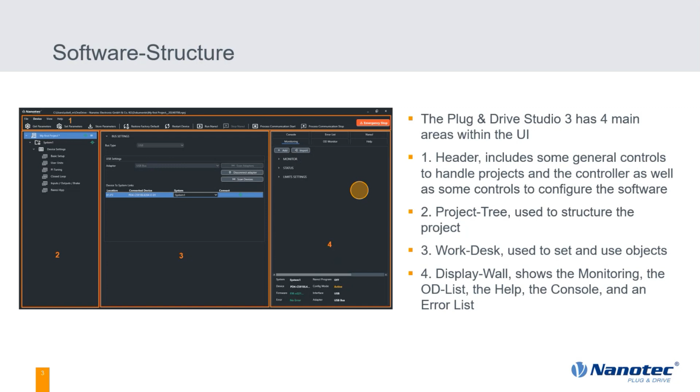Then we go on here on the left in part 2 with the project structure. So if we open the template, we will see this project tree, which is used to structure your project and the included devices. It mainly has 4 layers. The first one is the project layer here on the top. In this case, it's called My First Project. This is the overall container for everything that belongs to your project, the main project layer.

The main project layer then contains the different systems, we call it in this case. But in the end, a system is just a single device. So if we talk about my PD4C head here at my desk, then system 1 is just the Plug & Drive motor PD4C. Then we can have a look at the next layer, which is 3.

In this case, it's called device settings. It's simply a module group layer. It's used to sort different modules into a group. The different modules, you can see them in area 4 here. These different modules can be grouped into this module group layer so that it becomes nicely usable and you have a nice overview over the settings. You can also minimize module groups that you don't need that often, for example.

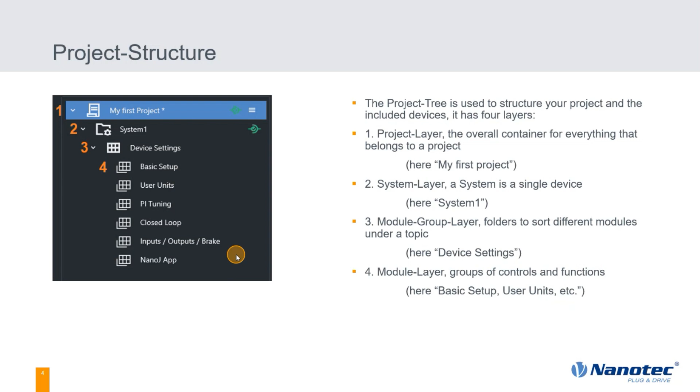So as I said in the beginning, this structure that you can see here is not fixed. You can adjust the template according to your needs, according to your wishes. If you, for example, want to add a second system to your project, let's say you have a CAN bus system and connect a second motor to your CAN bus, then you can simply right-click on My First Project and add a new system, and it will show up here.

Then we can add a new module to that system, a new module group in this case, by just right-clicking on new system and add the module group. And then, of course, you can also add different modules to that group. You can either do that with a right click, or there's also a button on the right, which we cannot see here, but you can also click that. And with properties, you can then rename the new module according to your needs so that you know what you want to structure there. Each of these items can then also be exported and imported, including all the underlying layers.

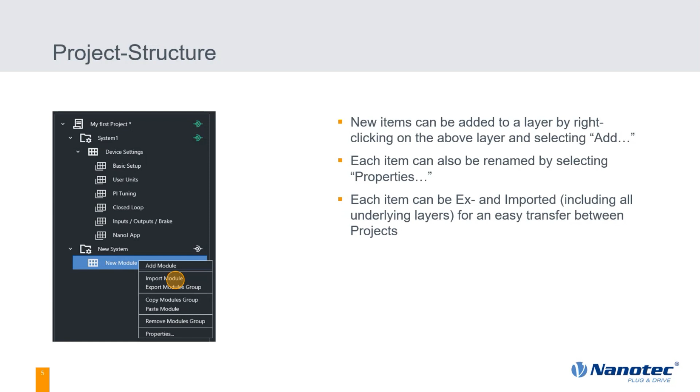So if you export a system, then you of course have all the underlying layers like the modules included. So you can export this module group as a file, save it on your computer, and if you have a different template, for example, or start a new template, you can import that layer in your template. So you can easily transfer all the modules and layers between your projects.

So let's have a look at the module structure. As I said, here in the middle, the work desk, that's the main part where we are going to work in the software. So if we click on basic setup, for example, here on the left, we will see all the controls in the work desk. That's basically the contents of your module.

These different controls like motor type, pole pair count, and so on, these different controls can be grouped into so-called control groups, for example, called basic, current settings, and same as in the project tree, you can also minimize these parts so that you have a nice overview of what you want to use and what not.

To add a new controls group, just right-click on the module where you want to add it. And if you want to add a control, right-click on the controls group where you want to add it. Quite easy. These different controls are so-called parameters.

A parameter is basically used to read or write a value, or you can also do that bitwise or bytewise of an index. You can select from different display options when adding a parameter. For example, you have normal controls where you enter a value, like pole pair count, where you just enter a value and write it to the controller. But you can also define drop downs where you select from different options that you want to write to the object that is selected here.

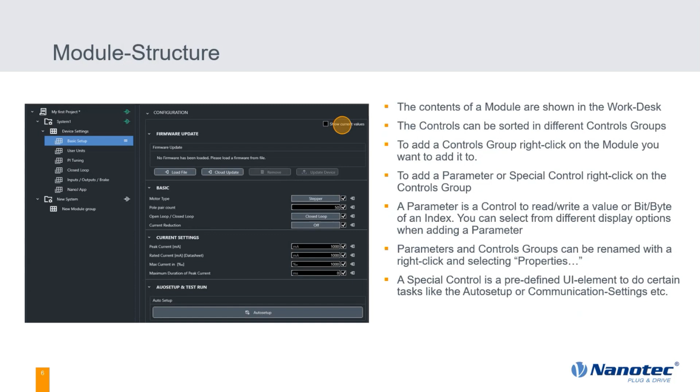Next to the name, it will also show the actual value, which is apparently on the device. If we go back one slide, one important thing is here, this option, show current values. If you want to see the current values of the device, just check this checkbox. Then you will see the actual values in this place.

Then we have an input box where you can write a certain value that you want to write to the index. And next to this input box, we have a checkbox, which is kind of important, because only if this checkbox is marked, then you can upload the marked objects with the set parameters button.

What you can always do, also without marking it, is use this button. With this button, you can directly write the value that you have put into the input box to the controller. But the get parameters and set parameters buttons, and also the store parameters button, will only write the values that are marked.

So the set parameters button will transfer all the marked values to the controller, the get parameters button will read all of the parameters that are marked from the controller and write it also here in these input boxes. The store parameter is basically for permanently saving objects, so it transfers the values to the controller and then permanently saves all of the marked parameters.

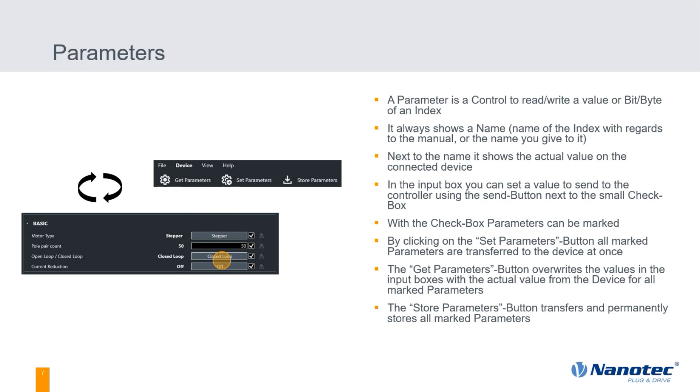I already mentioned them. We also have special controls in addition to the normal parameters. Special controls are available to handle specific functionalities of the controller. Let's go through the different examples of special controls that we have right now.

Auto setup is basically for calibrating your motor. It will measure the encoder alignment and some important motor parameters, which is important mainly for external controllers. If you have an external controller and external motor with encoder it matters, but if you have a plug-and-drive motor, it's not that important because it's already done at factory.

Then we have a special control for firmware updates. It's not shown here on the left, but it's, as it says, for up and downgrading the firmware on your connected device.

The next one can also be seen here on the left, simple jog mode control, which allows you to move the motor at two different speeds, a fast one and a slow one. Important to say, as long as you hit this button the motor will run. If you don't hit the button anymore, the motor will stop. So a very easy control for testing your motor.

If you want to have a bit more sophisticated test runs, then you can use the motion test control. This one is used to perform either single or sequenced moves in profile position, profile velocity, or in torque mode.

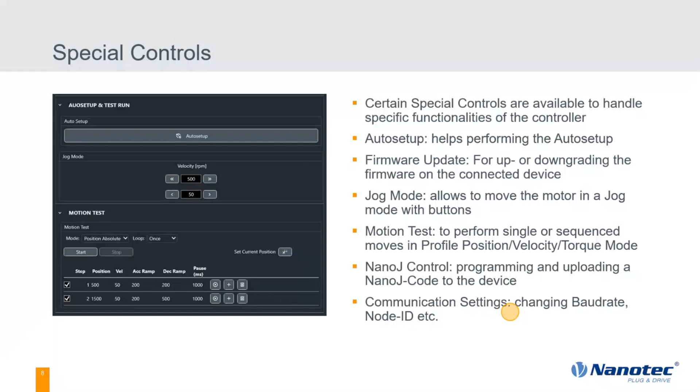All right. The next one is the display wall. So if you remember, that's area 4 in our Plug & Drive Studio 3 software on the very right. First one is the monitoring tab. Here you can generate groups and show different parameters of interest to get permanent feedback about the actual value of these parameters. In this template, we have grouped a few different examples.

So for example, error code, operating conditions, actual values of the position, of the velocity, also the actual values of the digital inputs, of the outputs, and so on, of the analog input. So here you can group certain objects of interest yourself, which you always want to track. For example, you could also add the status word of the controller. So here you're quite free, of course, what you want to add and what is interesting in your application.

Then we have the OD monitor. I think I already mentioned that. It shows a list of all available objects on the controller. The Help tab shows information about the selected object in the work desk directly from the technical manual. So this is also something new compared to Plug & Drive Studio 1 or 2. We did not have such a help functionality there.

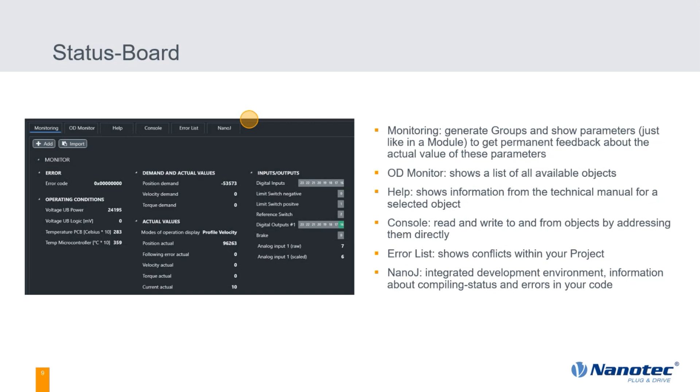And then lastly, NanoJ, which is the integrated development environment, as I said. It shows information about the compiling status of the code and errors in your code. And as I said, you can, of course, upload the program from there. All right. Then our last slide on the PowerPoint is to show you how you would establish communication with a device. As an example, here you can see the PD4C, as I mentioned.

So if you want to establish communication, we have to click on the project in the project tree, this one. So in this case, my first project. Then we select the bus type in this dropdown. In our case now USB. Then we select the adapter that is used for USB, and usually there will only be one for USB. With scan adapters, we would see different adapters, but now we only have this one. So we connect to the adapter and scan for devices.

If we scan for the devices, we will get a list of all the available devices here in this list. And you can see now here the PD4C, and in the system column, we determine which system we want to connect this device to. So in our case, we only have system 1, so we choose system 1. With this connect button, we finally establish the communication to our Plug & Drive motor. And if it appears green, then you can be sure that the communication is established correctly.

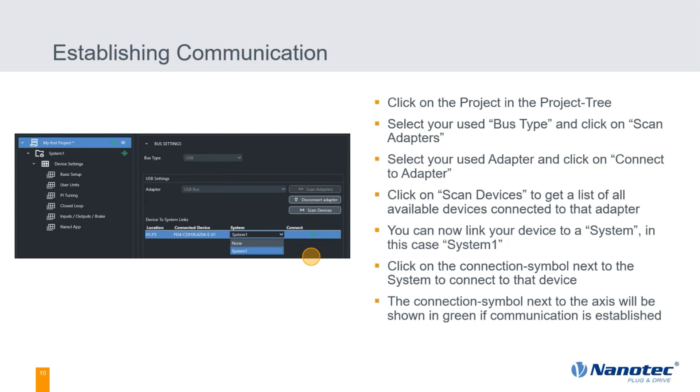So now we are connected to the controller, and I think it makes sense that we now have a look into the software itself. Okay, so we have seen it in the beginning of our training. If we open Plug & Drive Studio 3 for the first time, we will see this template selection screen. So in our case, we have now connected a Plug & Drive motor to our PC. So we choose the template PD motor.

We can adjust the project name as we like, but in this case, I will just leave it as it is. Then we hit create project. Okay, it was opened on my second screen, but now you should be able to see it. So this is now how the software looks like.

The first step would now be to establish the communication to our Plug & Drive motor. In the bus type, you have a few different options. Basically, all field bus interfaces that we offer so far, apart from Modbus TCP and EtherNet/IP. In this case, you would just use Ethernet with REST. But in our case, we have a simple USB motor, so we choose USB.

We scan the adapters, but actually we will see it's only one. So we connect to this adapter. We scan for devices, and now we see we have one device connected to the USB bus, and this is my PD4C on the desk. So we choose now system 1, which is the only system that we have. And with this button, which is currently white, if we click on it, it becomes green, and we are now connected to our motor.

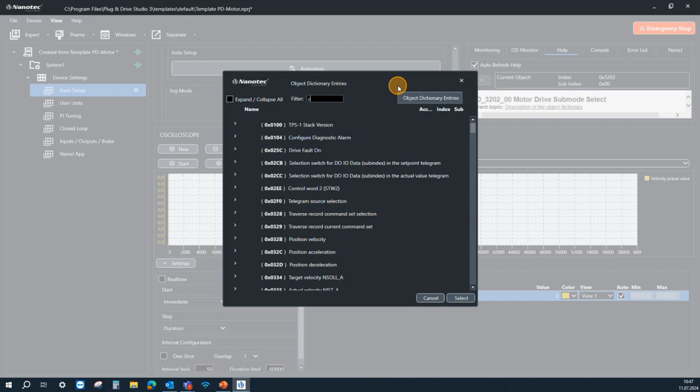For example, if we want to have a look at the current, now we get all objects that have current as a description. We are now actually interested in the motor current. So we use this one, actual current. That's the current that is currently applied to the motor. Select. And now it definitely makes sense to use a different color for this object, for example, red.

Then you have a few more settings for the oscilloscope. For example, a start trigger. You can, for example, do an immediate start. You can also say, okay, I want the oscilloscope to start once the motion test is started. We can also test that in a second, but now we do immediate.

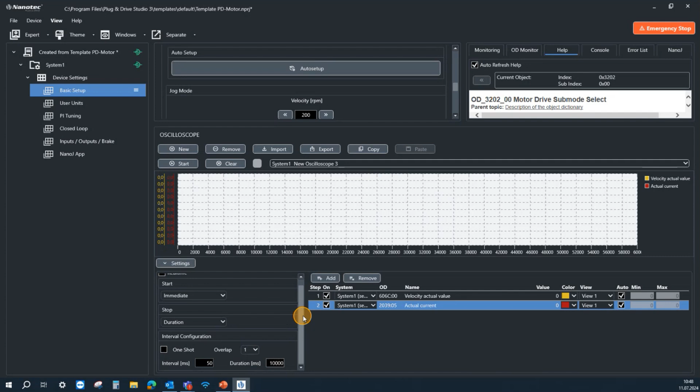You can define a stop trigger. Either you say, I just want to manually stop the oscilloscope, or we define a duration. So let's say a duration of, I don't know, 10 seconds would be 10,000 milliseconds, and the sampling period, let's leave it at 50 milliseconds. So now we have done all the settings. We can minimize this window.

We want to have access to the jog mode, of course, but now we have an immediate start. So now we see the actual current, which is quite low, of course, because the motor is not powered yet. And in yellow, we have the actual velocity. If we now run the motor, we can, of course, see the actual velocity rising to 200 RPM and the actual current rising to about 200 milliamps because I don't have any load connected here on my desk.

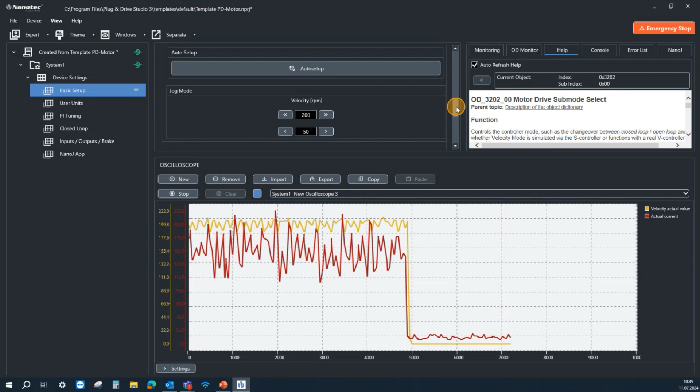So this is how you would use the oscilloscope. Regarding the start trigger, which I think is quite nice. So we need to stop it again, have a look at the settings. So we can define the motion test as our start trigger.

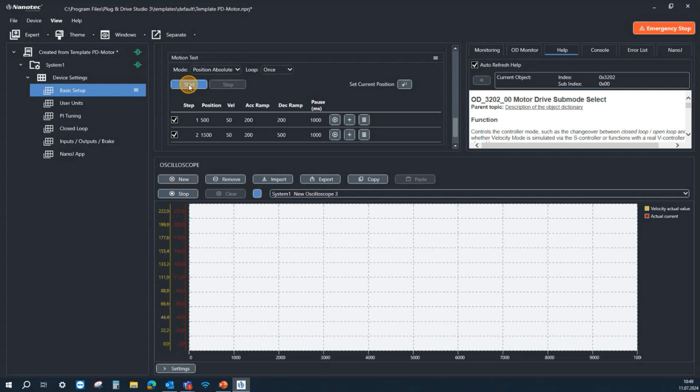And if we now start our motion test, so if we now click start on the oscilloscope, nothing is recorded because the motion test is our start trigger. So if we click start, also the oscilloscope starts with the motion test. So this is a quite nice feature, I think.

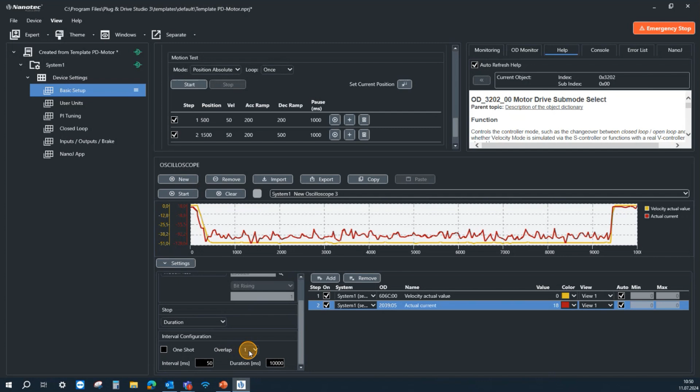If we stop it again, I can also show you something that I actually like quite a lot, because if we go back to here in the interval configuration, you can define a so-called overlap. Right now, we did not have any overlap. If we, for example, set it to 3, maybe let's use a bit less of duration, 5 seconds maybe.

What happens now if we start the oscilloscope, which is then started with the motion test? It will now record for 5 seconds, and the overlap now means that the next oscilloscope values are overwritten. Actually, maybe let's use a bit less of duration and shorter interval. Motion test is the start trigger.

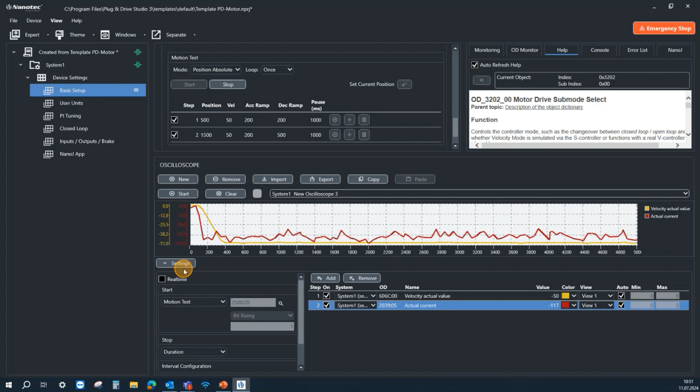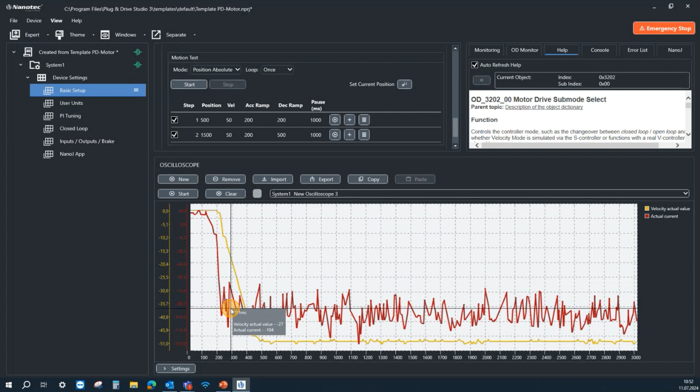Okay, the motion test now just takes a bit too long, but what you would see actually with this overlap functionality is that the next oscilloscope values are then overwritten to these, and the old values are displayed grayed out. So that's what the overlap means. But for now, I think we will go on. So that was the oscilloscope. We can now choose it to not be shown again.

So that was our basic setup module group. Then we have another module group for the user units. So here you can choose the SI unit for the velocity and for the position. So for the velocity, the default user unit in the latest firmware version is revolutions per minute. If you want to change that, for example, to meter per second, then you can do this with these drop downs. Just write this to here, then we have meter per second, and then maybe it makes sense to use, for example, meter, or if we use 10 to the power of -3, then we have millimeter. So this is how you can set up your SI units in this tab.

Of course, if you have a linear system, for example, then you need to define a feed constant. For example, the thread lead of your lead screw. If you have a gear ratio, then you can define the gear ratio here. The advantage is that your user units are then always after the gear, not after the motor. And in this case, the feed is calculated from the feed constant. Okay, but let's go back to revolutions per minute, and for example, you can also choose increments without any exponent.

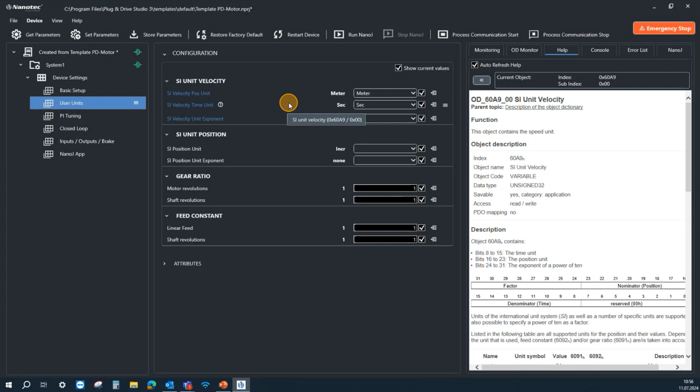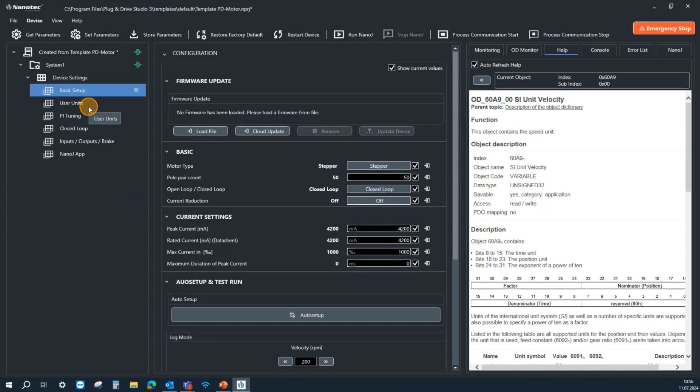Okay, maybe that was a bit of a bad example in this module, because there are still some bugs maybe in our templates or in the software. So maybe we go back to the basic setup where it actually should work. So if we, for example, use a different peak current here and then go to get parameters. So here, this is how it should work with the get parameters. I have noted down this problem, so yeah, there will be updates coming and new templates, so don't worry about this one. This is how it should work, but I think the basic functionality of the get and set is clear with that.

In the PI tuning tab, we have some controls and parameters for the motor tuning. We have the position loop, the velocity loop, and the current loop. The current loop is separated into the IQ and ID, which is the torque building current and the flux building current. So here you can adjust the tuning parameters, but basically, especially for plug and drive motors, the presets that you have here should be fine. But if you see, okay, with my load, the motor is not behaving as I like, then you can adjust the tuning parameters with these values here.

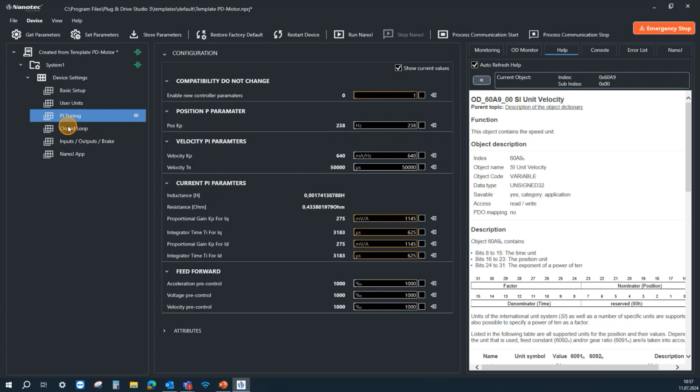Then we have a few settings, let's say advanced settings for closed loop. You have some additional functionalities in closed loop like auto alignment, real torque mode, slow speed mode, or activating the position loop for velocity modes.

Then, as we have seen before, the auto setup will run at some predefined standard settings, but we have included here two additional settings that are sometimes helpful. Let's imagine we have a linear actuator where you don't have as much space for the motor to move. Then it might make sense to use the short auto setup run, because then the motor will not move to some block, for example, which would be bad for the auto setup results. You can also limit the speed of the auto setup in per mil with this setting.

Here on the bottom, you can see the measurement results from the auto setup. So important for sensorless mode is resistance, inductance, and magnetic flux. So if you, for example, see there's no flux measured by the auto setup, you might want to repeat it for the sensorless to work correctly. You also get the feedback about the encoder that was recognized. So right now we have encoder selected for position, velocity, and current.

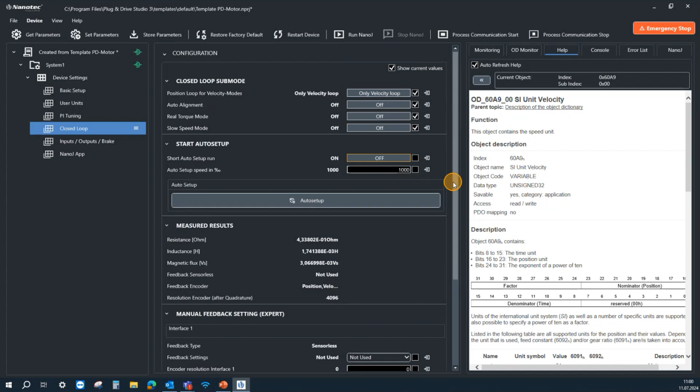The next one is for the digital inputs and outputs, as well as for the brake settings. So our digital inputs have certain special functions, our inputs 1 to 4. So you can activate them with this control. You can also select some advanced settings, like if you want to have the function of the input inverted, if you want to have, for example, 24-volt signals instead of 5-volt signals, if you want to use differential signals or single-ended signals, that can all be set here in the template. The same accounts for the digital outputs.

Yeah, and the brake settings don't really apply in our case because we don't have a brake on our plug and drive motor right now. But here you could define the timings of the brakes, when it should open, when it should close. Also PWM settings for the brake and so on.

Last but not least, we have the NanoJ app in our plug and drive motor template. So this is actually something new in the Plug & Drive Studio 3. Maybe some of you are familiar with the NanoJ programming environment in Plug & Drive Studio 1 and 2. We can open the NanoJ here on the right. If we go to show code, then we now see the project for our NanoJ environment. Maybe some of you know the basic project file is the vmmcode.cpp, also the header file, and 2 additional files for the NanoJ app.

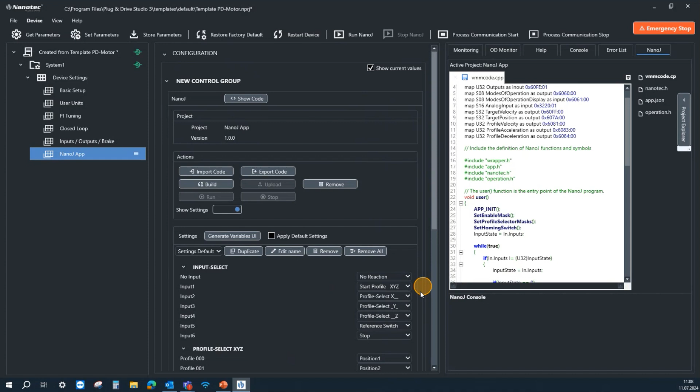Of course this is kind of limited. If there are additional functionalities you need in the code which cannot be set up with the NanoJ app, you can still stick to the classic programming of the NanoJ, which still works as you may be familiar with from Plug and Drive Studio 1 and 2. But I guess for very easy applications, and for people not that familiar with programming, it's really convenient to set it up just with these drop downs and then upload it with some buttons.

So that's the NanoJ app. Now we are actually through all of the modules.

Now I would like to go through the additional functionalities we have here in the status board on the right. We have seen it in the PowerPoint already, but here you can see it live. Let's make this one a bit smaller. In the monitoring, we have different groups of objects that are maybe of interest.

For example, we have the voltage currently applied to the motor, temperature on the PCB on the microcontroller. We also have the position actual value. If I now turn the shaft by hand, you can see that the position increases.

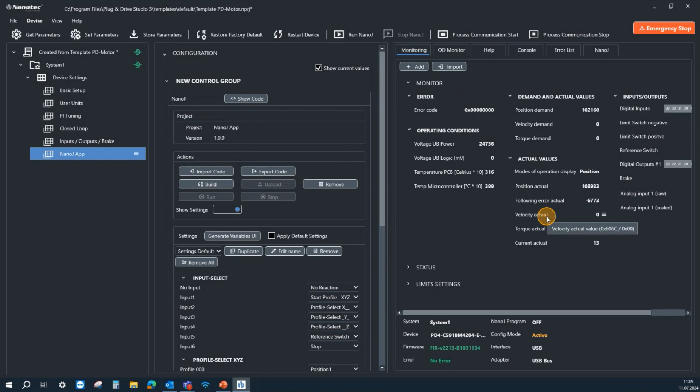What else do we have? Velocity actual value, you should also have seen it. In this case, not, because we are not using any mode of operation, but this would be displayed in case we are using the jog mode, for example.

So look at the velocity actual if we run it. As you can see, the unit is not corresponding to this one because we have set it up here, but as we have seen, it will change. So if we set up the SI units correctly, then this also works.

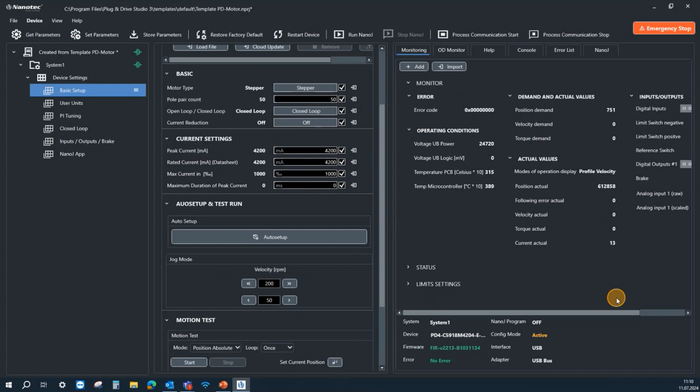Then we have an input mask for the digital inputs. If I, for example, click input 1 - I have connected a very easy I/O board to my PD4C in this case - and if I hit the different buttons of the I/O board, I can see the different bits of the digital input object being set.

We have some additional objects or information if a limit switch is triggered, or if the reference switch is triggered. We also have an analog input on our controller, which I also connected. So if I increase the analog input voltage, we can see the digital value also increasing. So this is basically the monitoring.

Of course, sorry, I forgot these ones. In the status, we can see the status word bit mask, so we have here the different bits of the status word. Right now we are in switch on disabled, that's why this bit is currently set.

And here we have some limit settings - peak currents, max motor speed limits, and position limits - which sometimes are important if, for example, your motor stops at some point and you don't know why. You can have a look at these limits; maybe one of these limits is then activated.

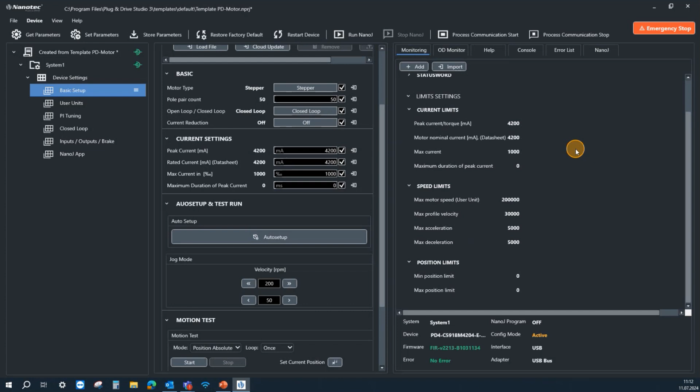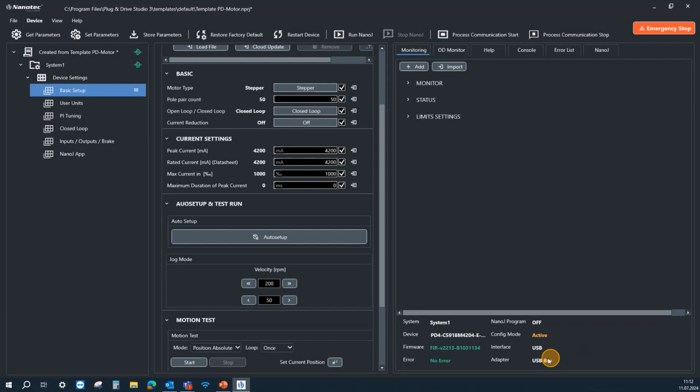Okay, so that's the monitoring. Actually, what we did not account for yet is this basic information on the bottom, which can sometimes be helpful, especially if you want to know if there's a NanoJ program running on your motor or not. Right now, there's no NanoJ program running, so it's off, which is important, for example if you want to run the auto setup. Some basic information about the interface, the current firmware, and if there's an error apparent.

Next one is the OD monitor. Here you really have all of the objects that are available on the controller. Depending on the controller, it can really be a lot, as you can see. But quite helpful for us in support is actually if you click read, all of the values from the objects are read and displayed here in the table.

And if this is done, we can click this dump. Then all of these objects with its values are written into a text file, a dump file. Most of the time, it really makes sense to send this dump file if you have a support inquiry. Just send us the dump file from Plug & Drive Studio 3 with your questions, because then we have an overview of all the settings on the controller, and most of the time we can find out the problem already according to the settings. Not always, but most of the time it's very helpful.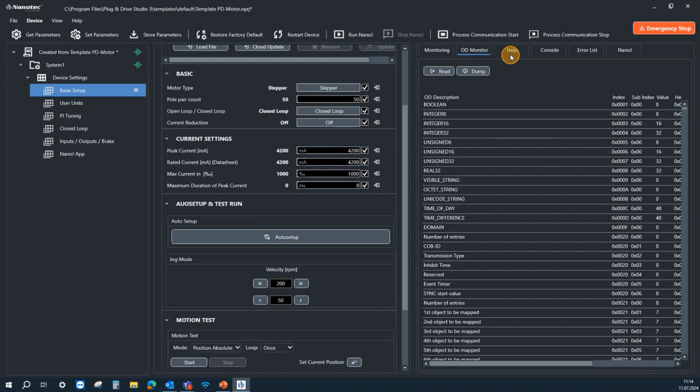Yeah, I guess the help, we already had that. The console can be used to read and write single objects. For example, if we want to read the status word 6041, just enter the object without any addition and hit enter. Then you will get the status word as a decimal value, a hexadecimal value, and the binary bit mask.

You can also write objects from the console. For example, 6040, which is the control word, just write an equal sign and then the value you want to write, and then you get confirmation that the value has been written to the object. So the console is quite helpful if you have worked for some time with our controllers and know some of the most important objects, because then you can directly access them from the console. It's quite fast and convenient compared to the OD monitor, for example.

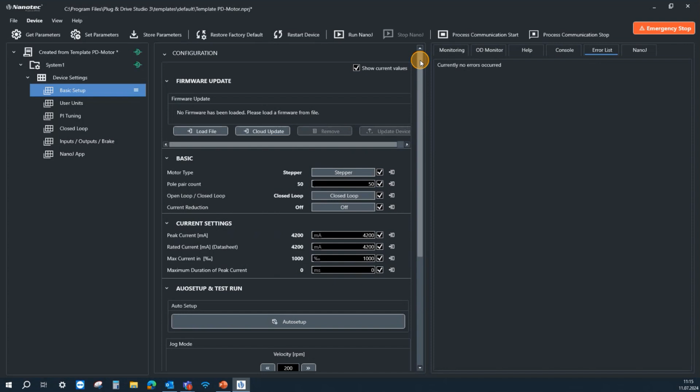Then we have the error list, which shows you conflicts in your project. An example of such a conflict would be if we copy the peak current parameter and then paste it. Now you can see we have the peak current here as well as here. For example, we write 2000 here and 3000 here.

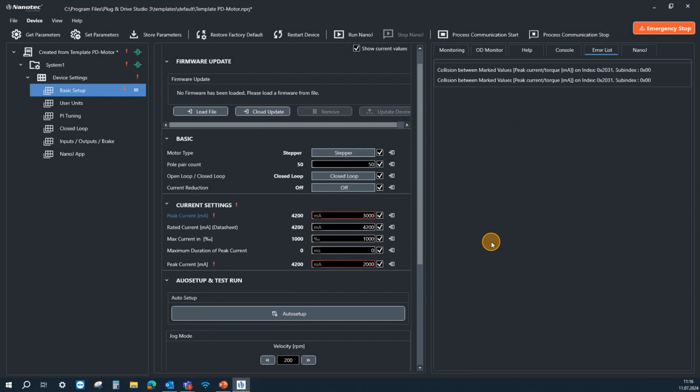And now we want to do set parameters. Then we get the message: parameter conflict detected, please check error list. Now we get the information that we should not write, of course, two different values to the same object. So in the error list, you will always get these kinds of conflicts in your project.

So we remove it again because we don't want to have that. And now we can write 3000 actually. And we can also store - we did not do this before. Here it will also ask you if you really want to permanently save these parameters. Yes, we want to. And now you can see that the conflict error is also gone now. All right, that was the error list.

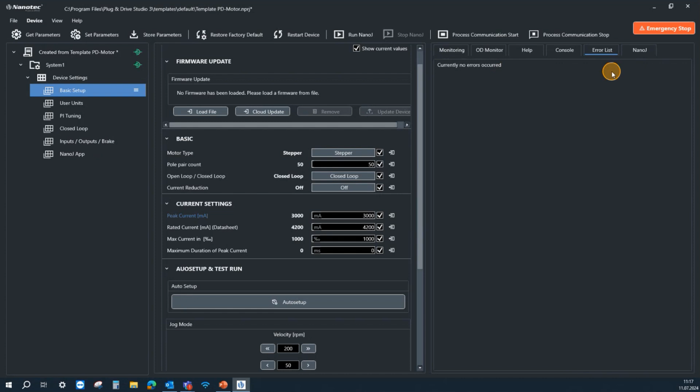We had the NanoJ. Then I will quickly look at what else we have. With file, you can create a new template, a new project. With open, you simply open a template file that you have on your computer. Then save the currently used template, or exit the software. Under device, we had these three. Then you can do restore defaults. With this button, you can restart the device, and you can also run a NanoJ program from here.

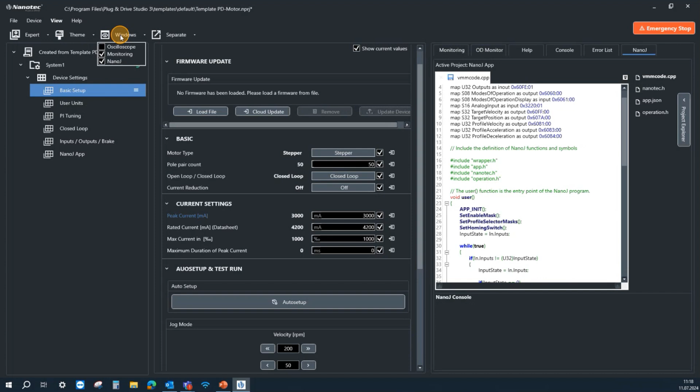Under view, we had some of these already. Under windows, you can choose additional windows or also remove windows that you maybe don't want to see. Under separate, you can separate these tabs into a separate window. One more thing, you can change the theme from dark to light. If you're more familiar with a light theme - I like the dark one better, actually.

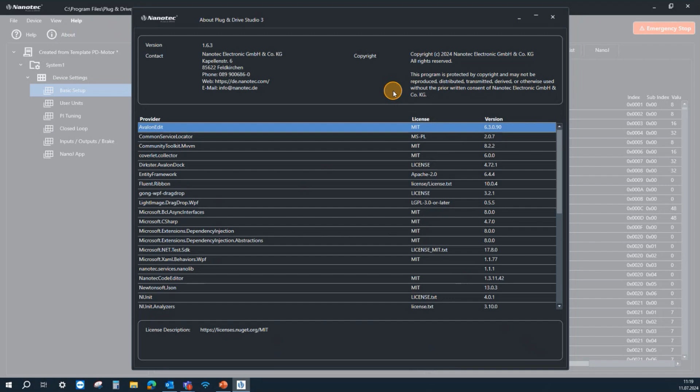Okay, so that would be the main settings for the software itself. Help is not really that interesting. You have a help window here for the software, and here you have some information about us, about copyrights and so on.

Okay, I think we are through the main functionalities of the software. Maybe it makes sense to just show you how you would adjust such a template now. For example, if you don't only have one system, but a second one, then you go on your project, right click - or that's basically the same. If you click on these three dots on this sign, you can also add a new system with... if you go back to here.

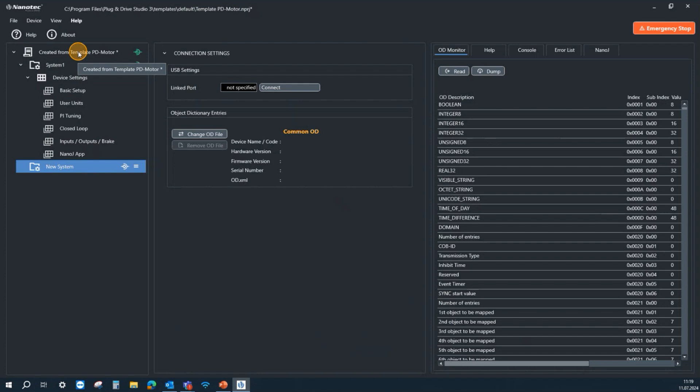So right now I only have one motor connected to my PC. That's why I want to link my motor now to our new system. So we go here and choose our new system for our motor to be connected. And we are here. Then with right click, properties, you can rename the system. So now we would have, for example, system 2.

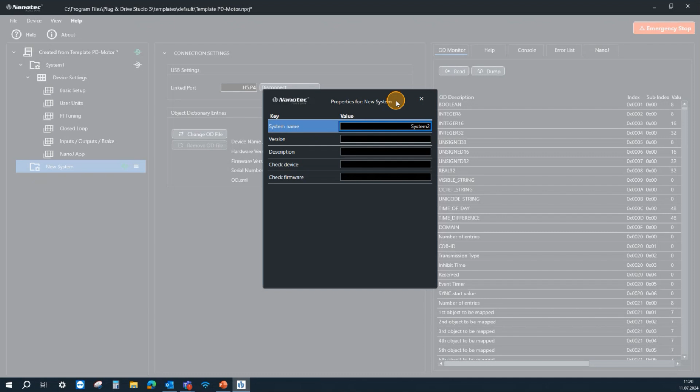You can also give a version, a description, and so on. But for now, we just change the name. Then, for example, you can copy the module from here, copy module, paste module, and we have it here as well. But of course, we can also add a blank module.

Then you can set it up as you like. And maybe as an example, new control group. We can also rename that my first control group, for example.

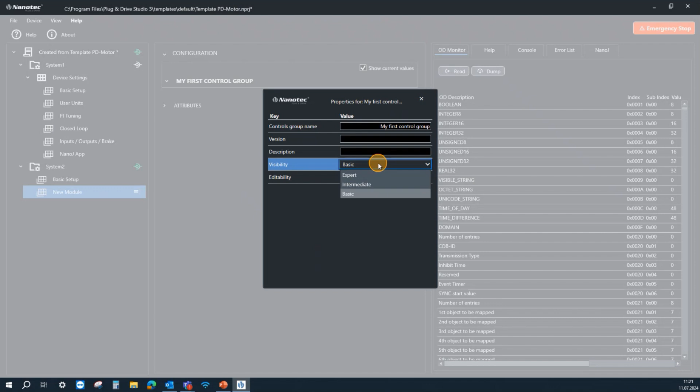One more thing that we did not have so far is the visibility and editability. So you have three different options here. Visibility, if you can see the control or not, can be changed from expert to intermediate or basic. So if we choose expert, for example, editability is if you can change the control, or if you can edit it. Let's also do it expert. Then you can choose here on the top with view, and here with this one.

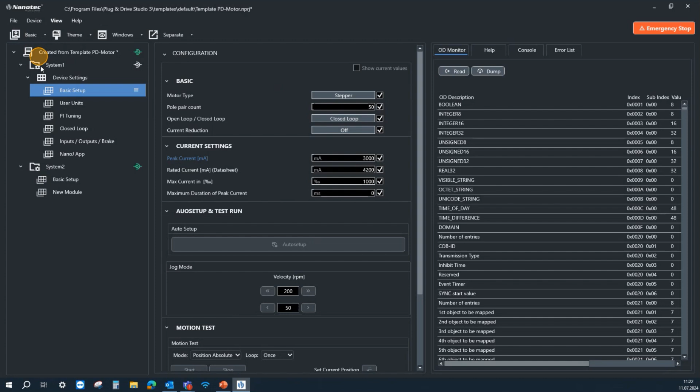If you now have maybe somebody from the factory where you don't want to have this control to be visible or editable, then you can change from expert to basic, for example, and then this control group disappears for a basic user. Also, some other settings like the firmware update and so on are now not displayed anymore in the basic view. If we want to go back and see our module, we would need to change to expert again.

So now we can see also the NanoJ programming now appears again. So that's the functionality of this three different settings.

Then we can add something to our control group, for example, a special control. I think we had all of these already. So memo text, for example, we did not have this so far. It's quite easy. It's simply a text box where you can add some kind of text for the user.

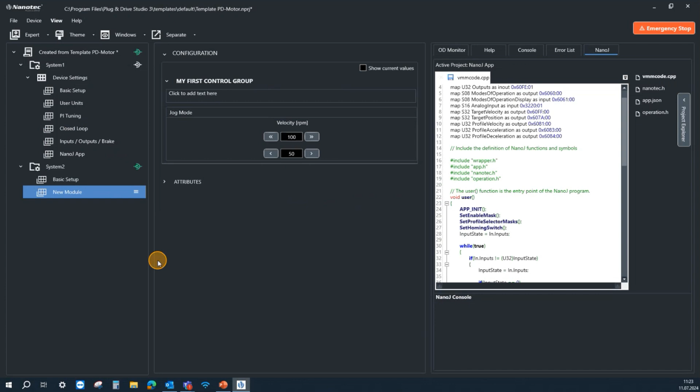Then we can add another special control, for example, I don't know, jog console. And maybe we add a certain parameter. Now we can choose again from any kind of parameter, let's say maybe the actual velocity.

And if we click next, then we can select between the different kinds of control or the visual representation that we want to have for this control. We have a standard control with the simple input box, read only, so just the value will be displayed. We have bit control, so we can manipulate the different bits of the object value. We can choose from drop down or a drop down list box mask control. Yeah, you can have a look at these different ones yourself, I guess.

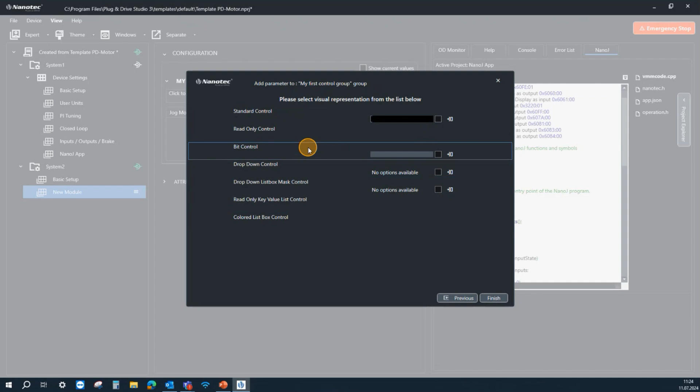Maybe one of these we can choose now is colored list box control, which is quite nice, I guess. So now we have velocity actual value, and here you can see unknown.

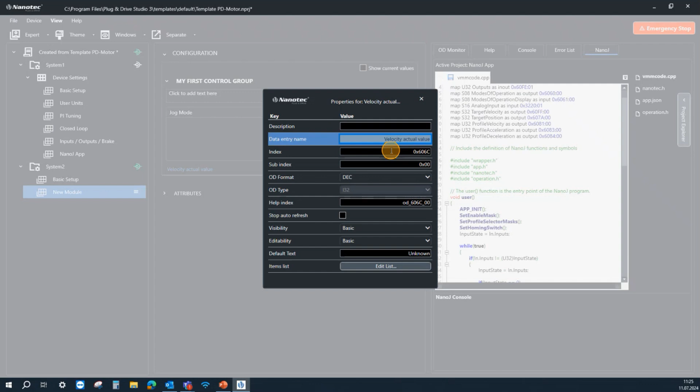So we go to properties, and here for the parameter, you have some different settings now for this parameter, either a description, but in this case, we just have the data entry name from the technical manual for this object, which I think makes sense. We can choose the OD format, like if we want to have a decimal value, hexadecimal, or anything else. In this case, decimal might make sense.

Then we can edit the list of our color list. So what we can do here is define a min and max value. So if we want to say, for example, between 190 RPM and 210 RPM, everything is fine. And we can enter a certain text here. So for example, fine. We can give corresponding color, for example, green.

So we can of course also add another value where we say if the velocity actual value is between 20 and 180, then this is bad for my application, for example. And we can choose a different color here, for example, red. Then we close it again.

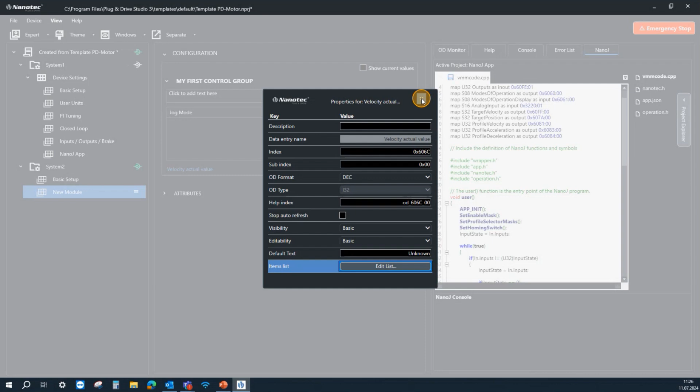And now we will see if we move the motor. Okay, now actually we need to adjust the user units again. So we go back to revolutions per minute. That's the default value.

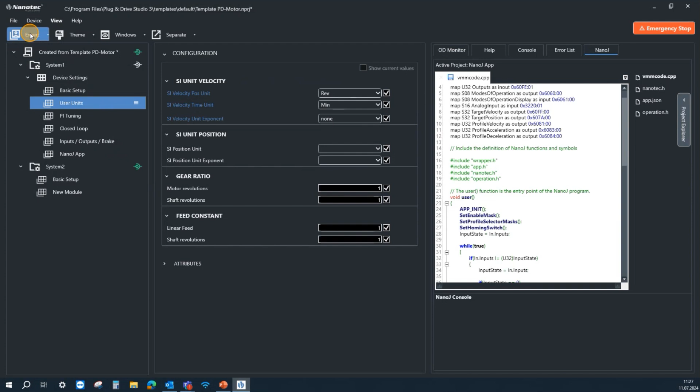Okay, actually there still seems to be a bug regarding the user units. What I wanted to show you is here that if we now move the motor at a certain velocity that we defined in our control, then this one will change to the text and color that we defined in the list. So this is how you can set up your modules as you like.

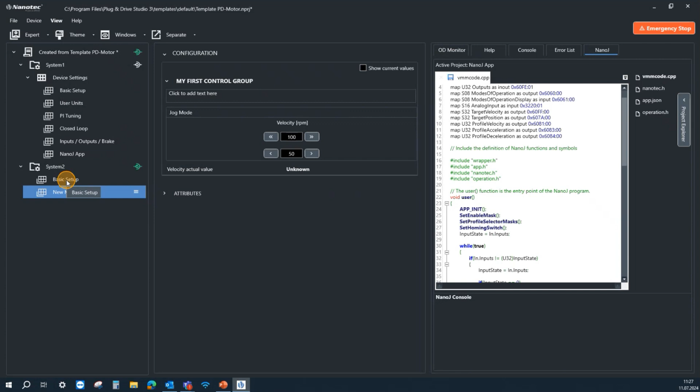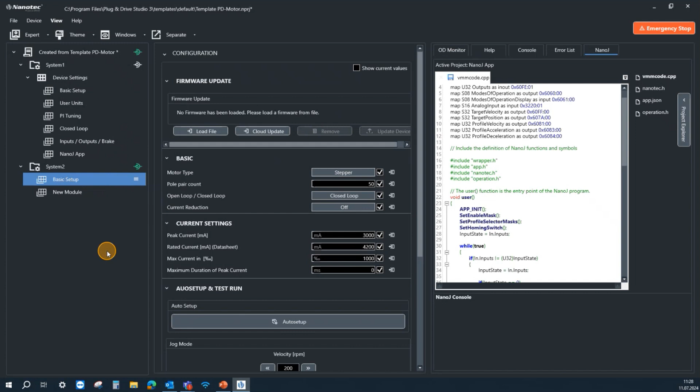As I said, you can copy and paste different modules. You can also export and import modules that you saved on your computer. All right, so I guess we are actually through the software.